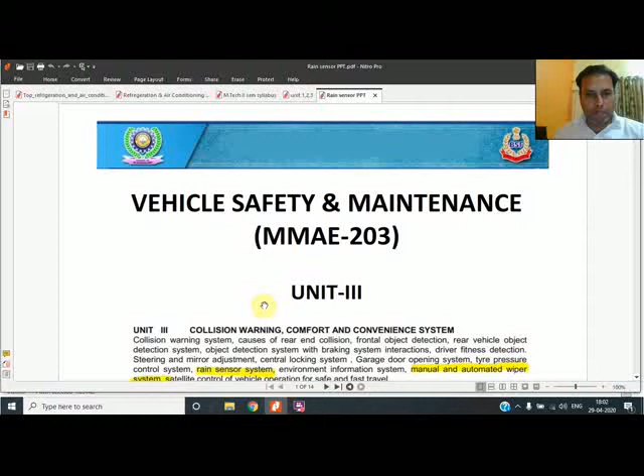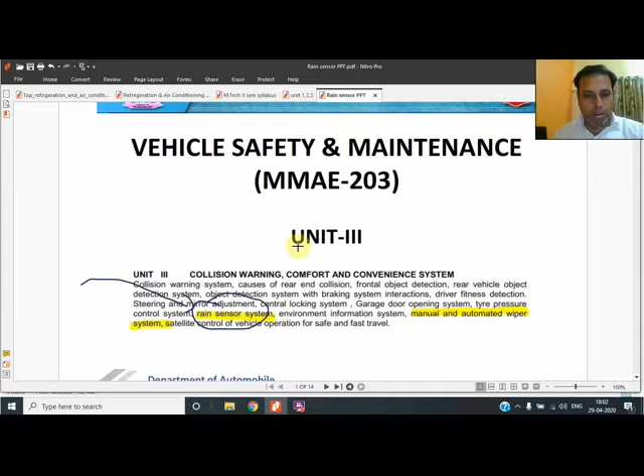In today's lecture, we are going to cover the topic of the rain sensor. These days, most modern vehicles are equipped with a rain sensor in which the wiper operates automatically as soon as the rain starts. So, starting with today's lecture, the main thing is what the rain sensor is.

The rain sensor recognizes rain droplets on the windshield so that the windshield wiper can be triggered automatically. This means the wiper should start as soon as rain droplets fall on the windshield of the car. If this particular car is there with the windshield, and a water droplet falls, it should start.

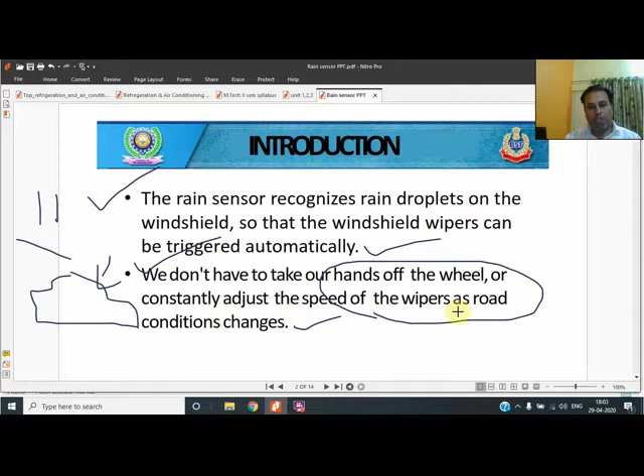We don't have to take our hand off the wheel, because this is a comfort and convenience feature available in the vehicle, so that the driver won't have to take a hand off the wheel or constantly adjust the speed of the wiper as per the conditions.

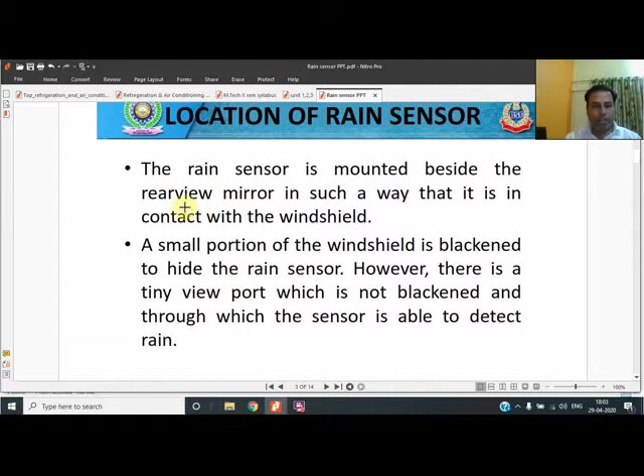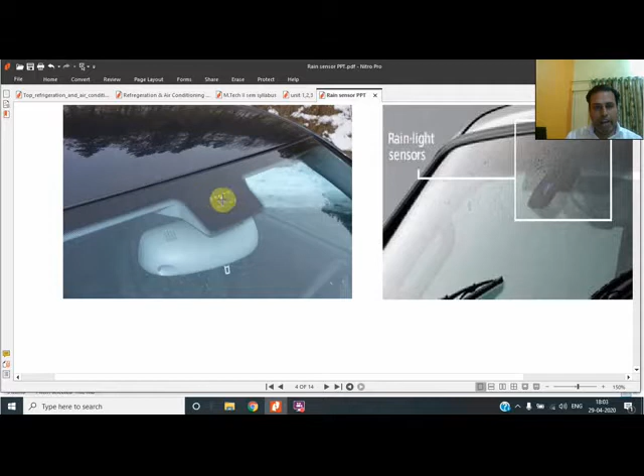And the location of the rain sensor. The rain sensor is mounted beside the rear view mirror in such a way that it is in contact with the windshield. The location is shown here in this image. You can see it is just behind the windshield, located here, and it directly detects the rain droplets. The second image also shows the location just behind the windshield, the front glass, the main windshield written here.

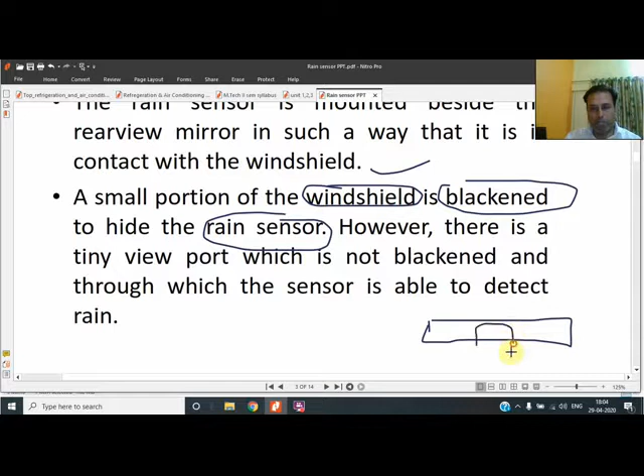It is a little blackened to hide the rain sensor. If the black strip is on the top portion of the windshield, a certain portion of it is removed, and here the rain sensor is located. You can see in the image that the blackened portion is given, and this much portion they have removed so that it can sense the rain droplets.

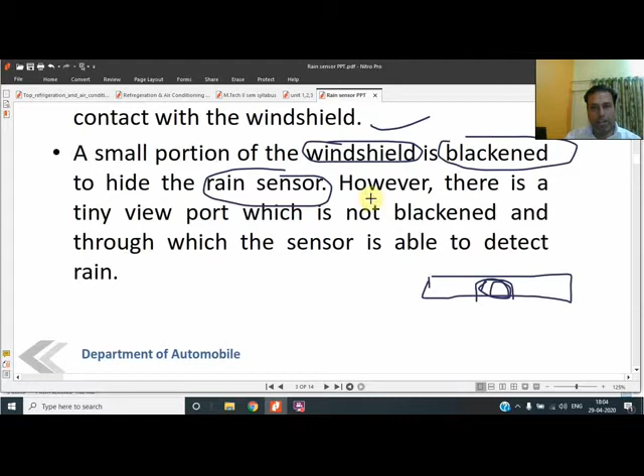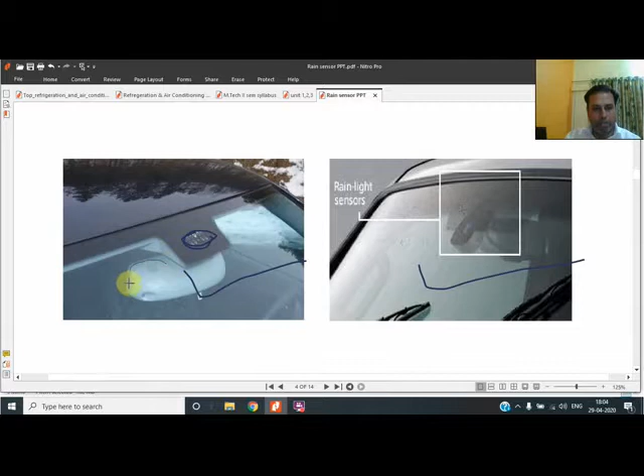However, there is a tiny port. This tiny port is mentioned, and I have shown you the location of the rain sensor in the figures. You can see these in your own vehicles or vehicles parked in your locality, where the location is beside the rear view mirror, in between the rear view mirror and the windshield.

The rain sensor works on the principle of total internal reflection. This technique makes use of infrared radiation, which is emitted by an LED and absorbed by a photodiode. If a rain droplet falls on the windscreen, this infrared radiation will be dissipated and less will be absorbed. From the lower absorption, it is determined whether rain is falling or not. I will show you through the image also.

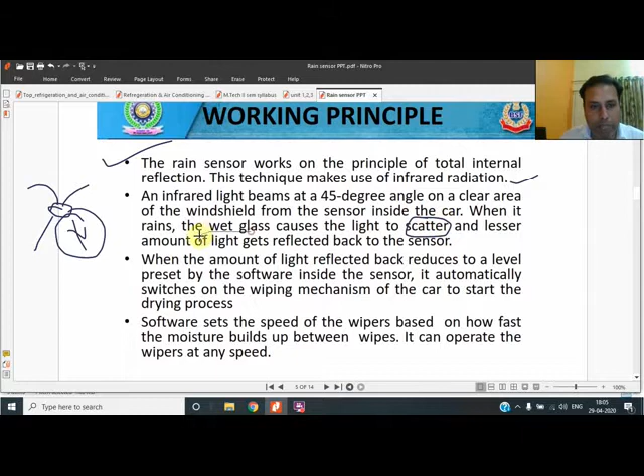The infrared light beam is sent at a 45-degree angle onto a clear area of the windshield from the sensor inside the car. When it rains, the wet glass causes the light to scatter and a lesser amount of light reflects back to the sensor. You can see in the image the 45-degree angle they have mentioned. The LED gives the infrared ray at a 45-degree angle.

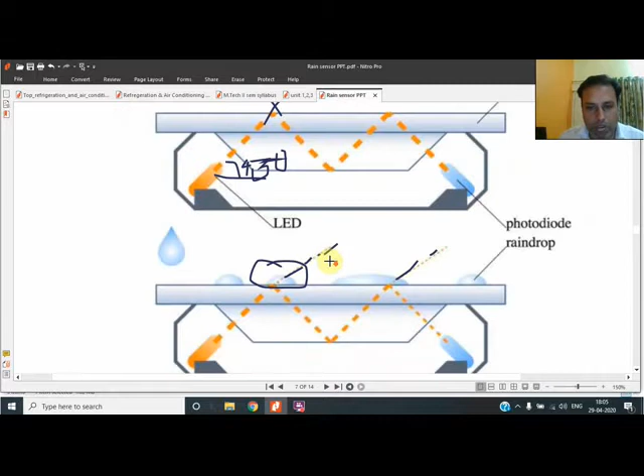If no droplet is there, then there is no problem. If any droplet is there, you can see a little bit of light gets scattered. So what will happen? The light absorbed by the diode will be less, and the software detects that if less light is absorbed, rain droplets are on the windscreen. Then the wiper will start automatically, because this gives a signal to the control unit, and the control unit gives the signal to the automatic switch.

That automatic switch is technically called a relay. You should know that in a vehicle several automatic switches are there, because you don't have to operate them yourself. This will operate the wiper. So the principle is that the amount of light reflected reduces because rain droplets have scattered certain light. This scattering is shown by this dotted line.

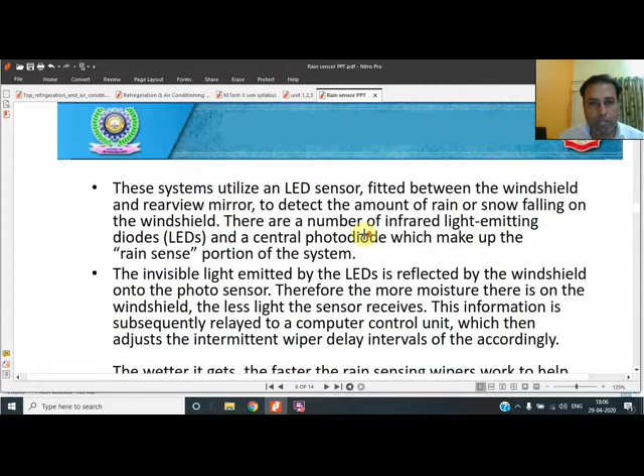When the amount of light reduces to a level, the software inside the sensor automatically switches on the wiping mechanism, because the software has a predetermined level of light. If the light is lower than that level, it will start. The software sets the speed of the wiper based on how fast the moisture builds up. It can operate the wiper at any speed level: 1, 2, 3.

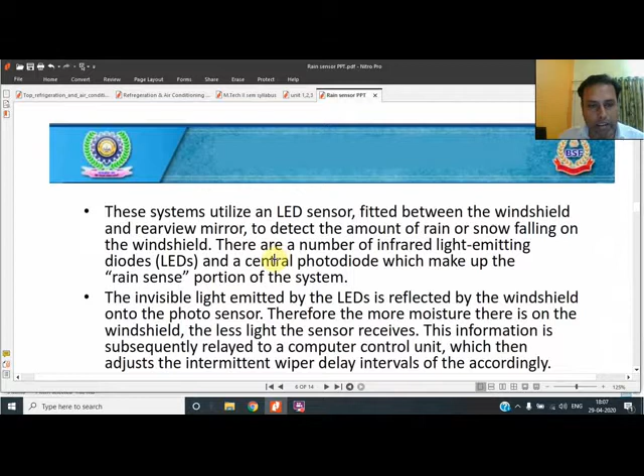So at any of the 3 speeds, or whatever levels they have mentioned in the vehicle, the wiper can operate. This is how the software inside the sensor works. Again, the working principle can be briefly given: these systems use LED sensors fitted between the windshield and rear view mirror.

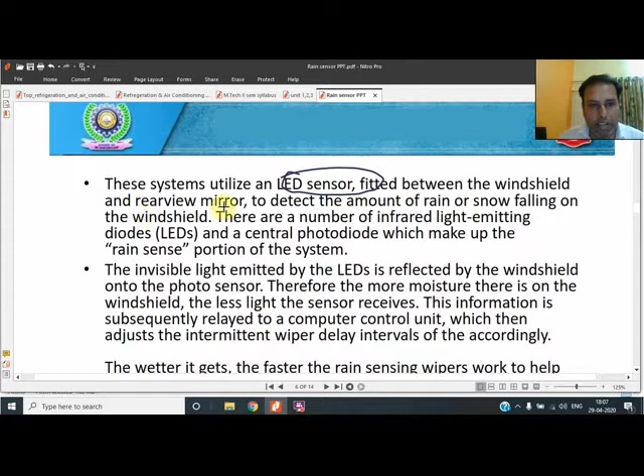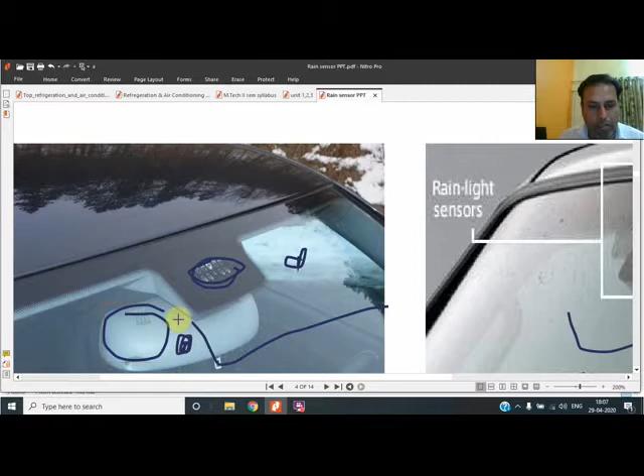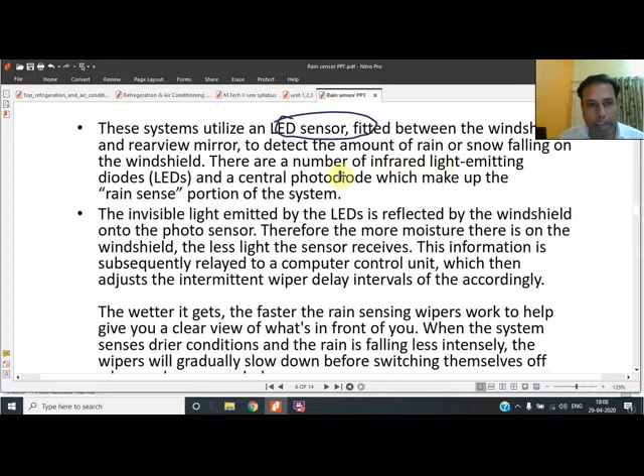Between the windshield glass and the rear view mirror, as I have shown you. The rear view mirror is shown in white color. It is fitted in between, to detect the amount of rain or snowfall on the windshield. There are a number of infrared light emitting diodes, several in number. These are the light emitting diodes.

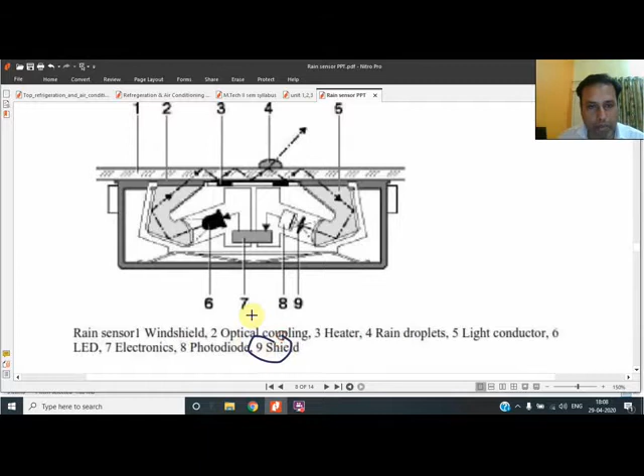This is a popular figure in which 9 parts are mentioned, and these 9 parts are shown over here. Of these, the LED is the 6th one. This LED gives the light at a 45-degree angle, and this is absorbed by this, called the photodiode. Just see the term, photodiode.

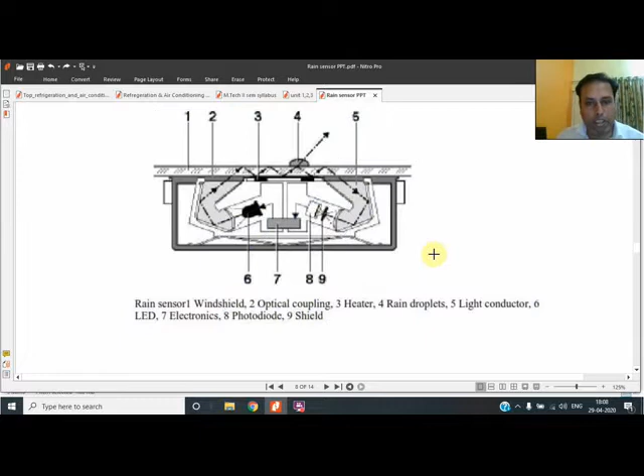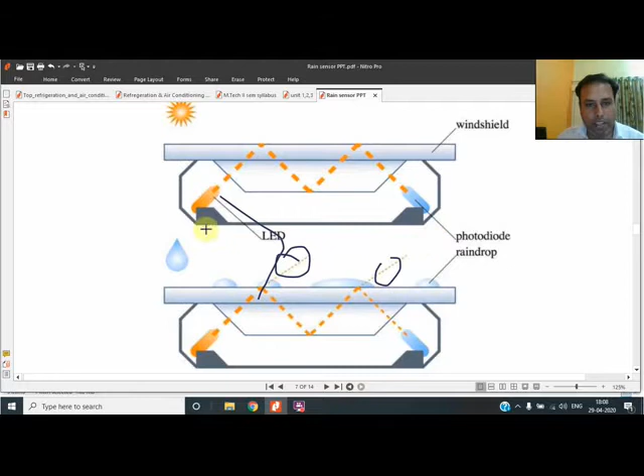This is the photodiode. This is a little bit complex figure because several parts are shown, and this is a simpler figure because it shows only the LED and the photodiodes. These 2 lines show the LED, and these are the photodiodes, absorbing the light. So these are shown over here.

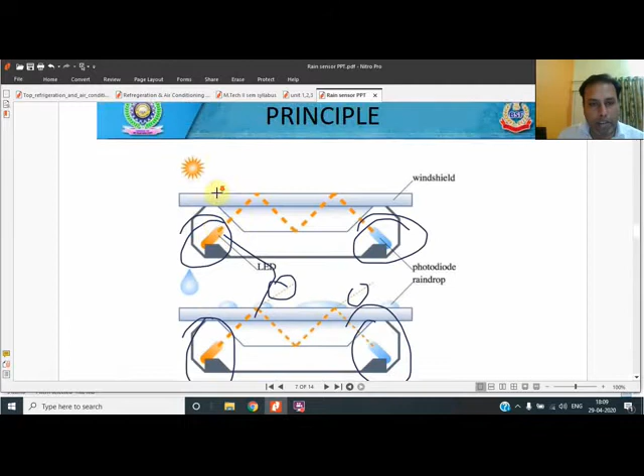There are a number of infrared light emitting diodes, several in number. They give the infrared light, and a central photodiode makes up the rain sensing portion. The photodiode absorbs the light. If a rain droplet is there, as shown in the image, the intensity of absorbed light will be feeble.

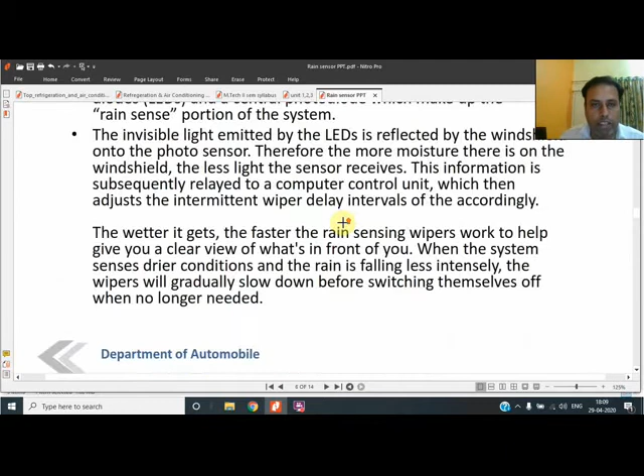You can see this intensity is feeble, and when the rain droplet is not there, it is thicker. So intensity variation shows that moisture is there on the photosensor. The more moisture there is on the windshield, the less light the sensor receives. This information is relayed to the computer control unit, which then adjusts the intermittent wiper delay intervals accordingly.

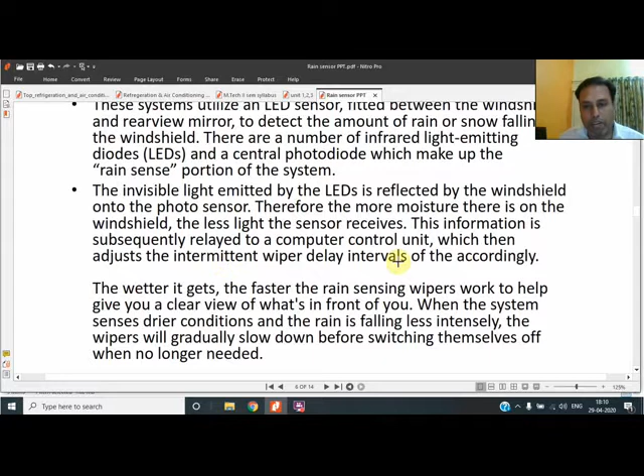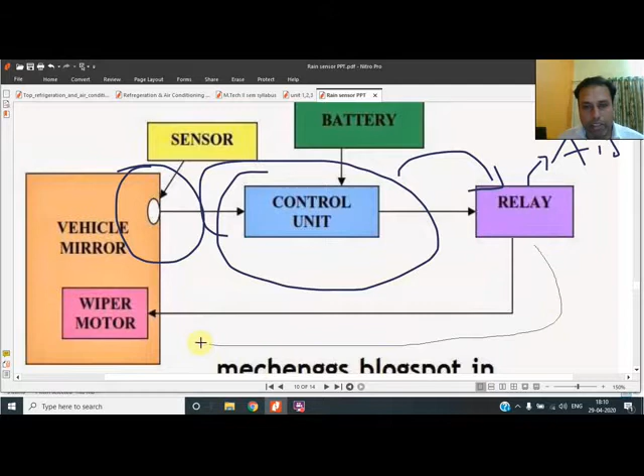So a control unit is also there. A figure for this is shown over here: when the sensor gives the signal, it goes to a dedicated control unit. That control unit gives the signal to an automatic switch, called a 3-terminal relay, which makes the connections, and then the motor gets started. The control unit gets supply from the battery.

And the last point is, the wetter it gets, the faster the rain sensing wiper works, because the thicker the drops are, the less light will be absorbed by the photodiode. The faster rain sensing gives you a clear view of what's in front of you. When the system senses drier conditions, it automatically slows down and stops.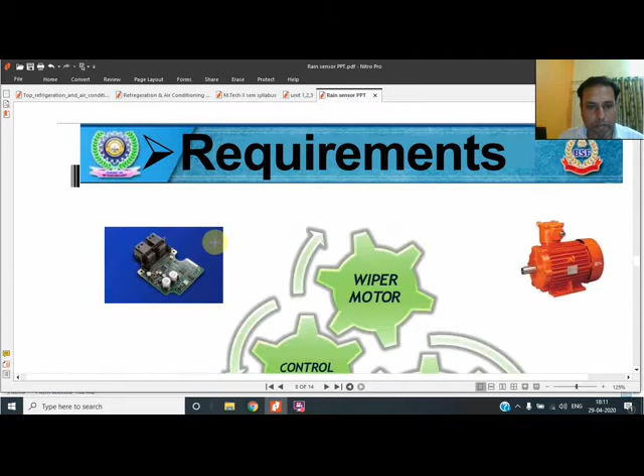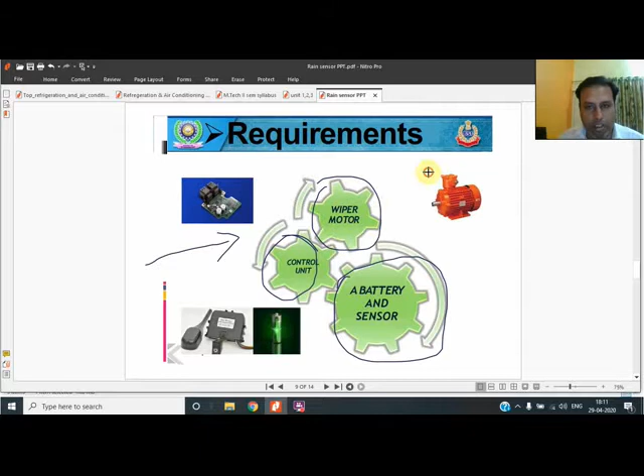Now, what are the requirements? If you want to construct it as a project in your own institute, a battery, a sensor, a control unit and a motor will be required. A continuous power supply is required to the sensor, the control unit and the wiper motor. This type of motor is not required; I have shown it symbolically. A small DC motor will be required.

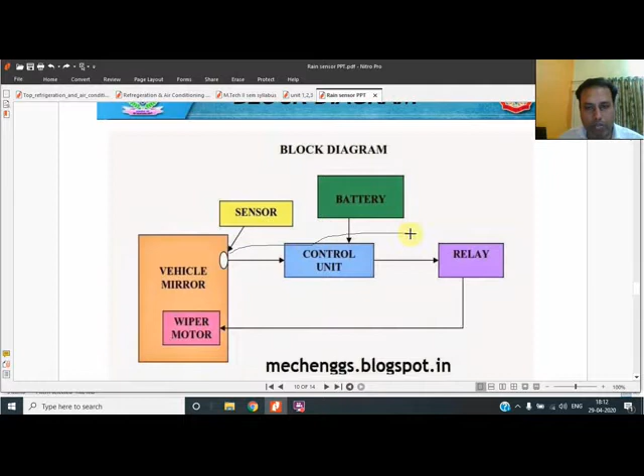This setup is again shown to you over here, how it works. The signal is given to the control unit. The control unit gives the signal to the relay. The continuous supply is from the battery, and the wiper motor gets activated.

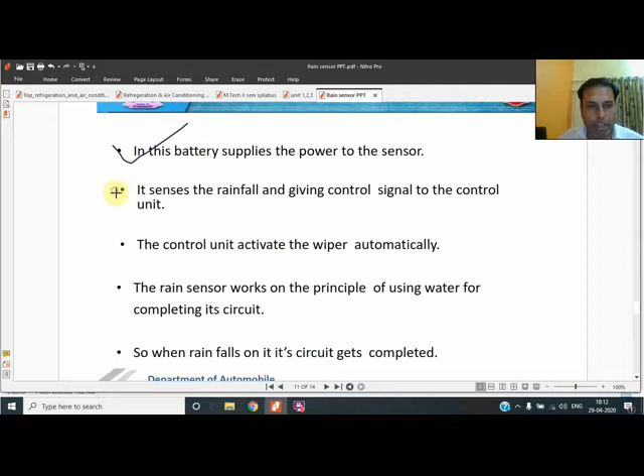The main thing is you activate the wiper motor. The power flow: the battery supplies power to the sensor, as shown in the figure. It senses the rainfall and gives a control signal to the control unit, which is shown here. The control unit activates the wiper automatically through an automatic switch, which technically we call a relay.

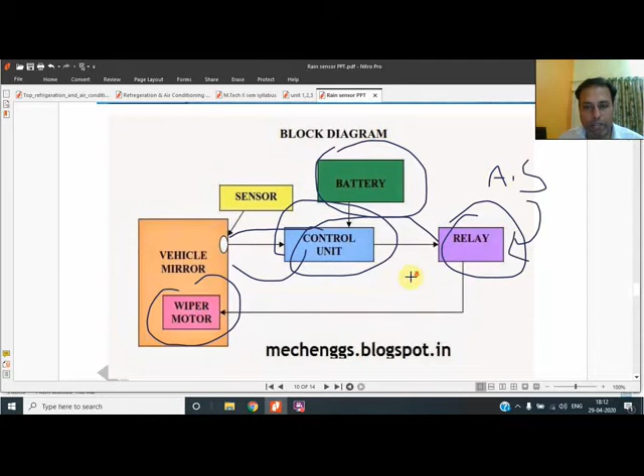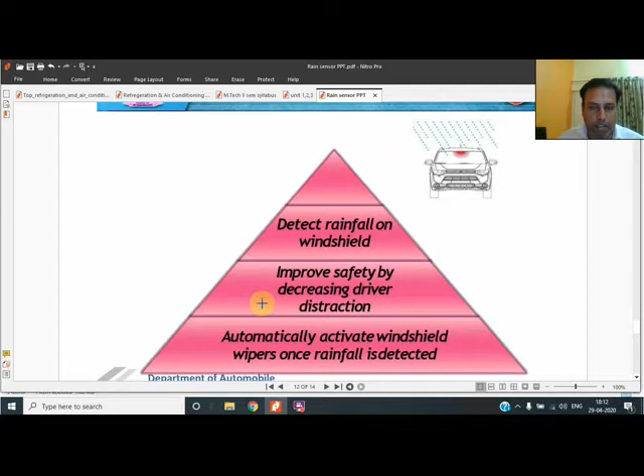The rain sensor works on the principle of using water to complete its circuit. So when rain falls on it, its circuit gets completed. To summarize, I have shown you the location of the rain sensor: between the rear view mirror and the windshield.

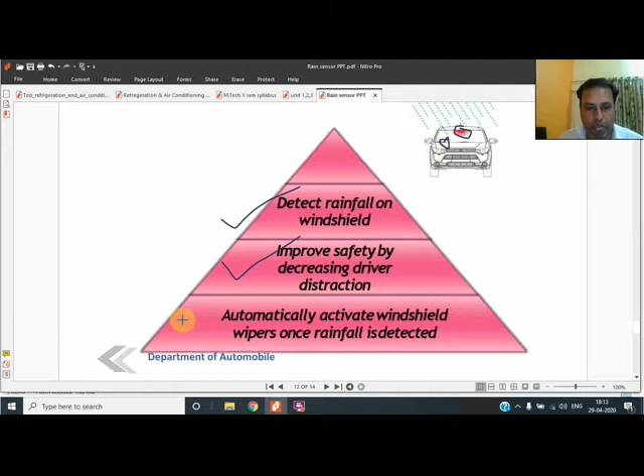It detects rainfall on the windshield. The main thing is this improves safety by decreasing driver distraction, because he won't have to leave the steering wheel and adjust the wiper settings. It automatically activates the windshield wiper once rainfall is detected.

The advantages are less power consumption, because the control unit takes very little power, and high accuracy, because no human interface is involved. The automatic windshield wiper is a convenience feature in the vehicle and is available in most vehicles.

Automatic safety and convenience are also there. The disadvantage is additional cost, because if this feature is present, additional cost is required for the optical sensor.

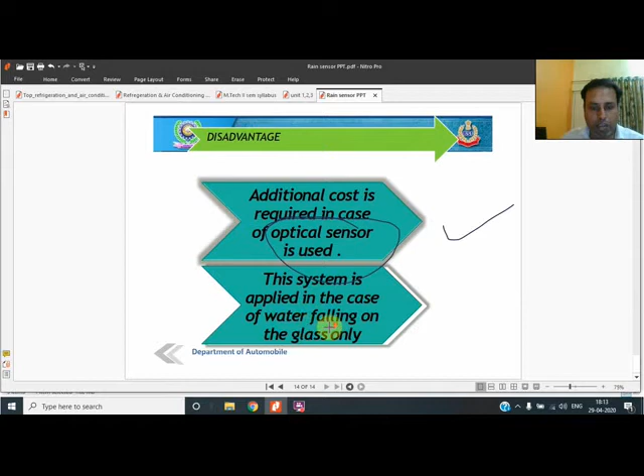This system applies only in the case of water falling on the glass. If you want to operate the wiper in other cases, we won't be able to, because it only responds to rain. If we want to start the wiper in other situations, we have to do it ourselves. So these are the two disadvantages.

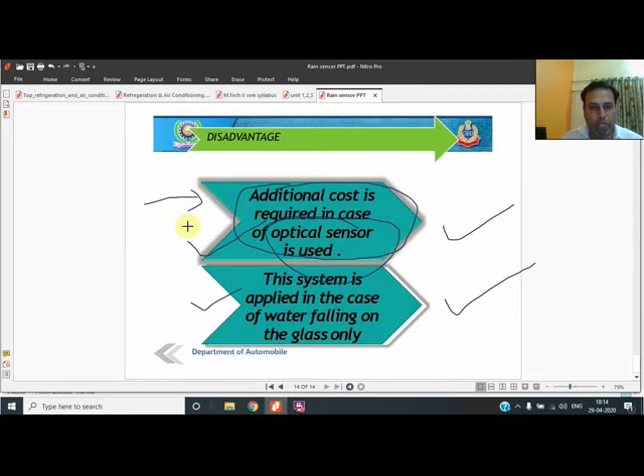These disadvantages are not major, because these days the cost is very low for these types of sensors, and only a small control unit is required. I hope you would be able to understand the concept of the rain sensor.

I would like to show one video also, of how it works and its location. For this I have downloaded a video from Toyota. In this, the rain sensor is being shown, with rain falling on the windshield and the location given. This is the location: between the rear view mirror and the windshield.

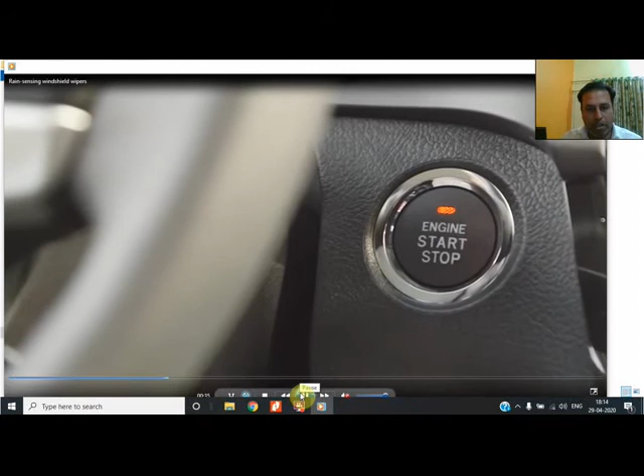This location is shown, and how it used to work, along with the speed settings. This is how the lever works. The engine should be in start position when you are setting it, and you have to set the lever to the auto position when you want to operate it.

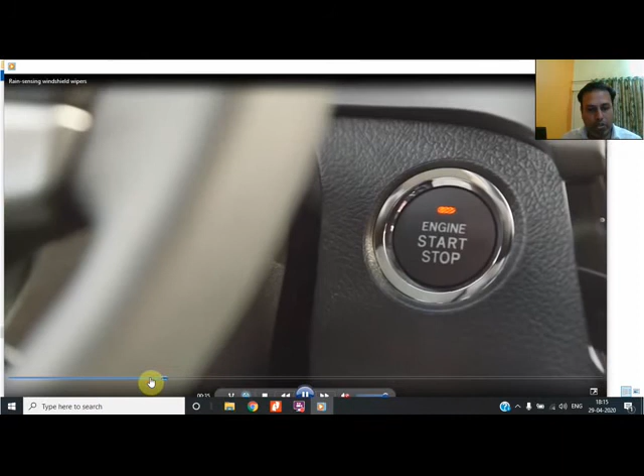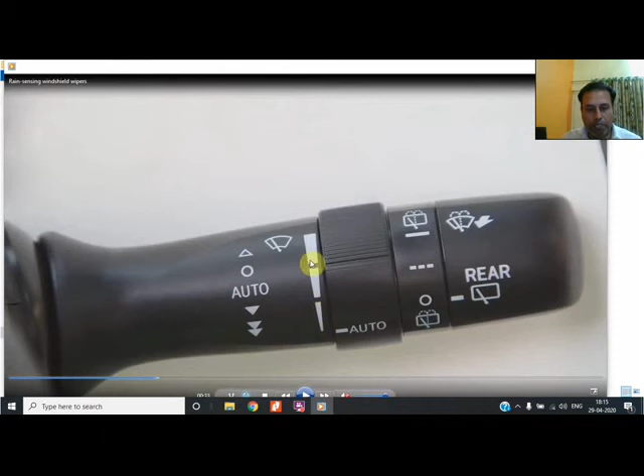I would like to show you how to set it. This is the auto position, and you have to set it there. These are the speeds: first, second, and third. You rotate it clockwise to increase the speed, and anti-clockwise to decrease it. And you set it to auto. So he will be setting it in the video.

In the video you can see he rotates it clockwise to increase the speed. These are the three levels of speed, and the auto switch is to be used.

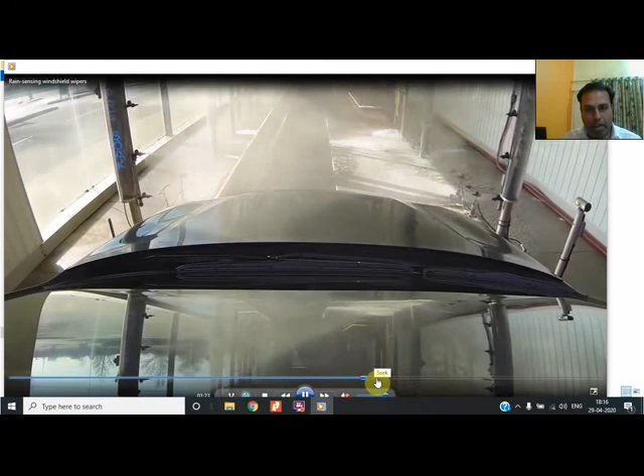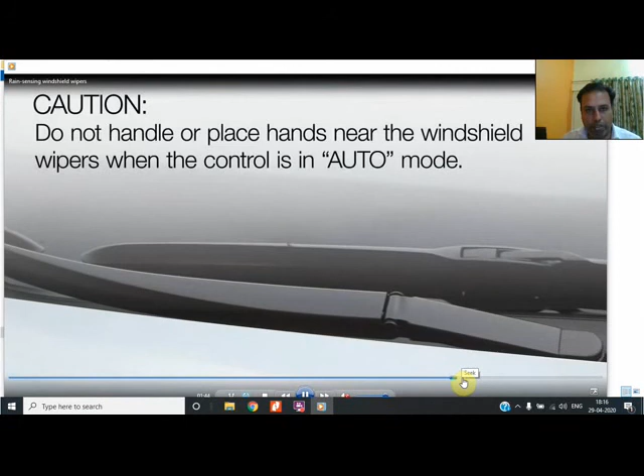There are precautions: this should not be activated if you are servicing the vehicle or in other similar cases, because if the wiper blade starts automatically during a service or cleaning operation, the blades could get damaged. The blade should be away from the windscreen, at the rest position, during service. So do not place your hand near the windscreen when the control is in auto mode.

If the vehicle has cruise control, such as long range radar or ultrasonic cruise control, then as a safety feature, when heavy rain is detected, the cruise control will automatically get deactivated for driver safety, because the wiper will be operating at very high speed, and it is not convenient to operate cruise control at that time.

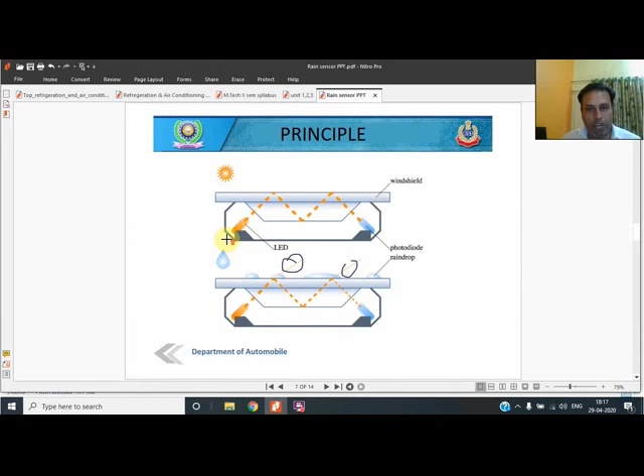These types of videos we can see, watch, and download, and hopefully this lecture would be helpful for you. Thank you.